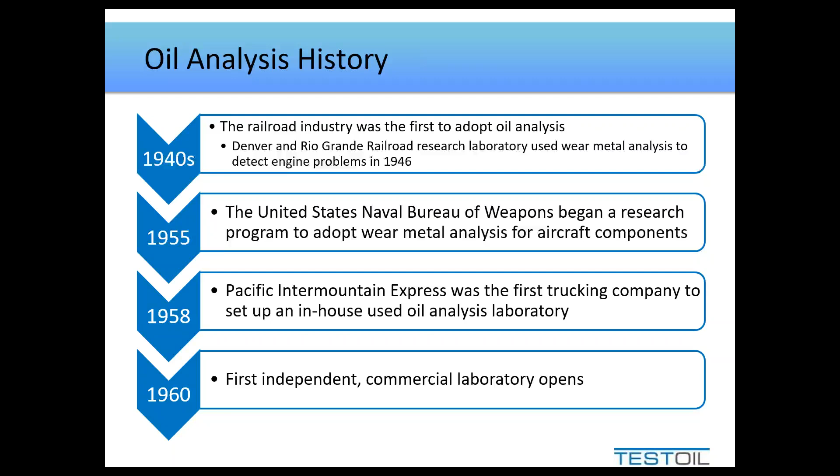Now, to begin this webinar, I thought it was worth taking a step backwards in time and looking at the history of oil analysis. So here's a quick overview of how oil analysis got started. The railroad industry was one of the first ones to actively engage in oil analysis as a preventive maintenance strategy. About a decade after this happened, the United States Naval Bureau of Weapons was looking into it. And within a few years, you started to see trucking companies use it. After the initial successes, the very first independent commercial oil analysis lab was opened, and the rest, as we say, is history.

Now, why I point out this timeline is just to highlight what it was like back then. All of those early adopters had a few things in common. They were all very large fleets with a very limited number of different OEMs, model configurations, things like this. Almost without fail, the only sample that was taken was at drain. It was always taken from the same location and under very similar operating conditions, because if it was a trucking company or a railroad, they would run the same routes, they would operate the same way, so even seasonal variances would be accounted for. The other thing, though, is there were very few customers and there were very few labs. Therefore, there was a strong relationship between the labs and the customer. So if the results came back a bit weird, the customer usually could phone up the lab and they'd have a discussion about it. If, for whatever reason, a failure was missed, again, the customer could work with the lab to reestablish some alarm limits and make them better.

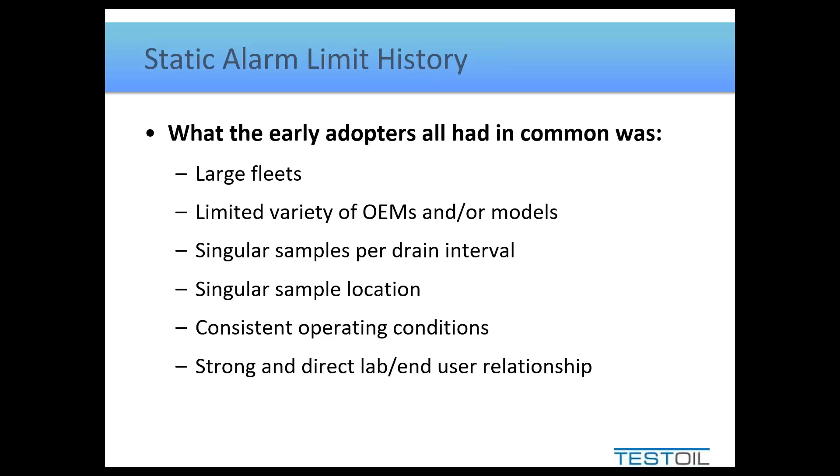In today's world, if this was to exist, we would refer to this as big data. This is what we use today to try and make sense of a whole bunch of data, and that's something that they were able to do 60 years ago when oil analysis was really kicking off. They could figure out what normal looked like, and they could see what was the trend towards the abnormal variances or triggers, and set the alarm limits to ensure that the warning came soon enough, but not too soon and not too late. Now, the nice thing is, like I said, because they had these large fleets always operating up and down the same roads, the same rails, they could account for any seasonal variations or operational variations as well, and make sure that whatever noise occurred in their data didn't trigger any alarms.

So this is how good it was, and this is, like, again, oil analysis at its infancy. And the thing is that this established a reputation for oil analysis that has carried forward to today, but actually is no longer that valid.

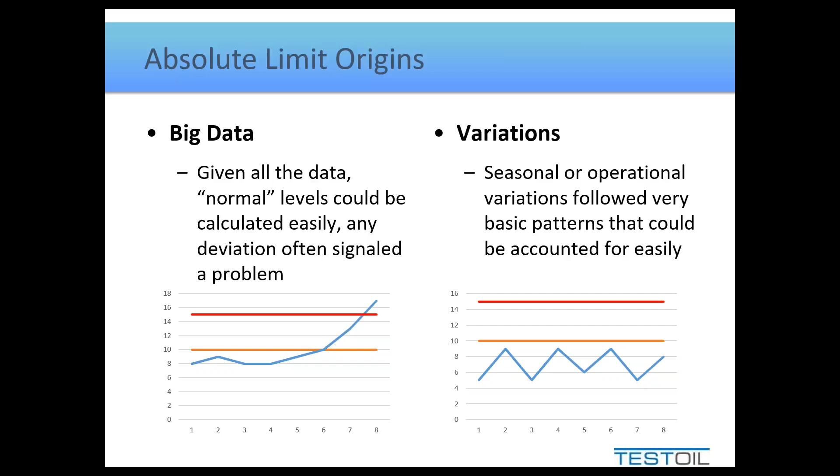A good example would be to show you what oil analysis today looks like. So your average commercial oil analysis lab deals with all sizes of fleets, right down to a single one-off application. We have virtually an unlimited variety of OEMs and models. We now take multiple samples per drain interval, so we're not just sampling the end of drain sample, we take what we call mid-interval samples. We have less control that the samples will be taken from the same location under the same conditions every single time. And given how many people have adopted oil analysis, there's many, many more times customers than there are labs.

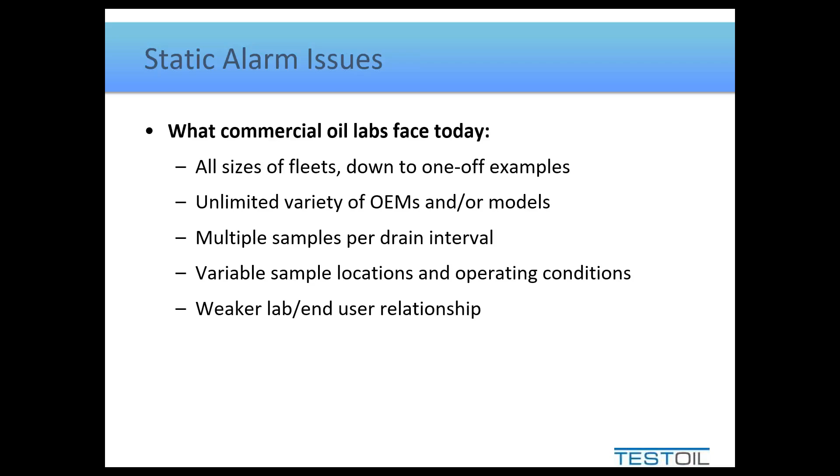So there's a much weaker relationship between the customers and their labs, to the end that most labs are unaware of any efforts the customer may be making to extend drain intervals or extend mean time between failures or any of the other common metrics that you might look at. And where this kind of gets funny is that to this day, we will still receive samples and they'll be marked something like Gearbox 101A and no other information. They can't even tell us what kind of oil it is, what brand of oil it is, what viscosity it is. We don't have a sump volume, we don't have any make model information to go with it, nothing. And why I point this out is even though these types of samples still hit the lab, the most common thing people are going for is to ask a question like, what's an acceptable level of, whatever it might be, a wear metal, a contaminant, a degradation property. And that is a very, very difficult question to answer when so little is working in our favor anymore.

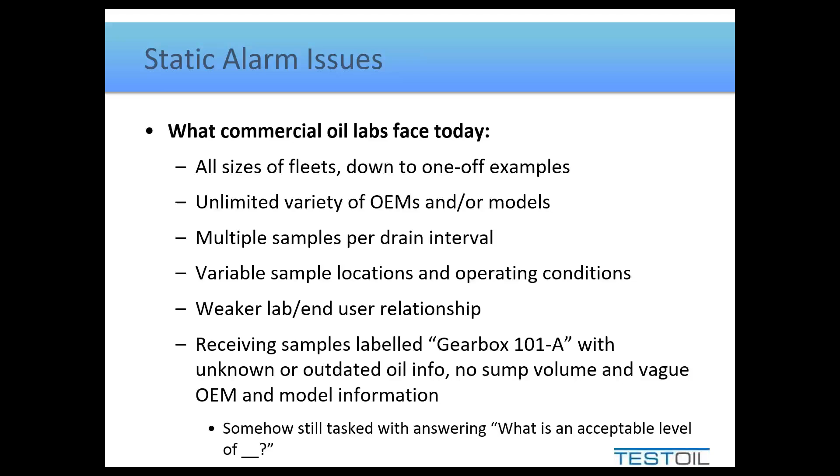So what I'd like to do in the beginning part of this presentation is walk us through where some of these static alarm limits come from. Now, basically, there are four main sources. You can get them straight from the OEM. You can get some from your lubricant suppliers. If you're lucky, you might have industry-specific limits. These might come from user groups or other organizing bodies. But ultimately, most people do rely on the commercial labs to provide some set of limits.

Now, as I go through those first four, what I'm basically going to do is absolutely tear them apart and point out how lousy they are. Most of them don't work well on most samples most of the time. Ultimately, what you would like to work towards, if you felt static alarm limits were the thing to do, they would be set by the end user and they'd be in line with any goals they have. Now, I'm not going to show how to do that. I'm going to then transition over to trending, but I'm going to go through these first four and explain to you why they're so bad.

So every one of these is a real example. I credited some of them. The ones that I pick on the most, I don't tend to credit because I don't want to be disparaging towards the person who supplied it. But let's start with OEM limits. So here's an honest-to-goodness published OEM limit. There's a major typo in this table that I guess was never caught, and I've reproduced the typo just so you can see how little these tables might be used, because somebody should have caught this and fixed it.

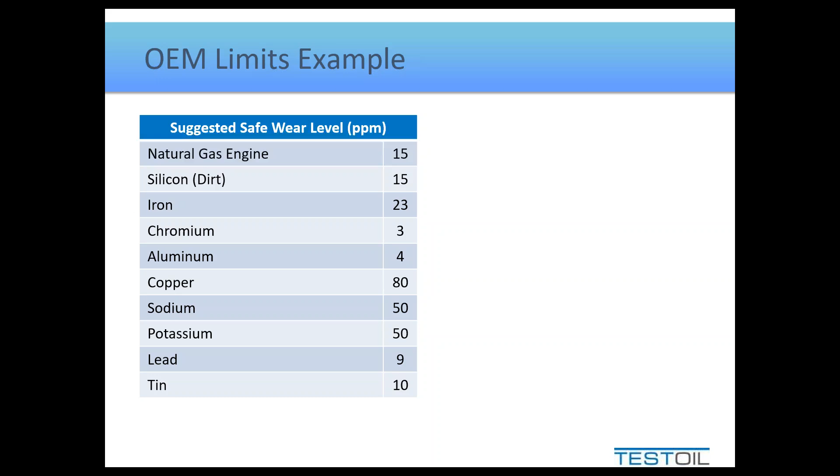Now, the whole time I've been talking, perhaps somebody has picked up on what the typo is, but looking throughout this list, at the very bottom, 10 parts per million. If you told me how big the system was, I could find a way of representing what 10 parts per million looks like, how much tangibly that would actually be in terms of bits of material. But if you look at the top of this table, 15 parts per million natural gas engine, I don't know how I can show you that. So I'm just pointing out the silliness of this table, that somebody didn't catch on to that particular line.

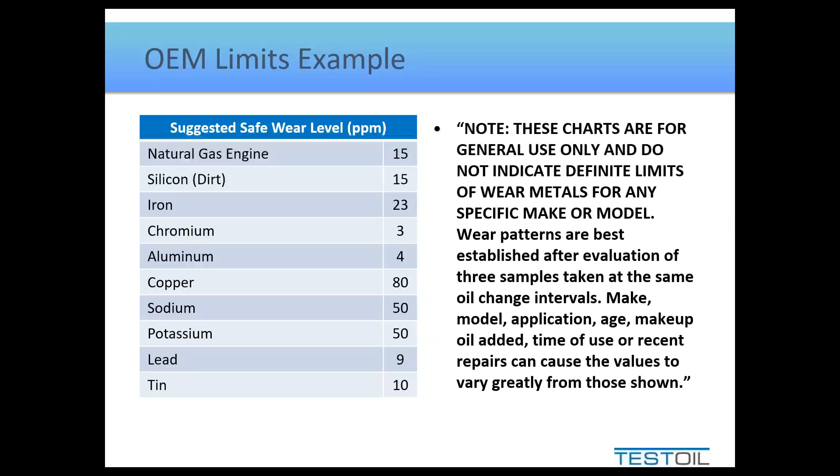So why do OEMs publish limits like these? Well, they're really only there to highlight major issues, and most of them are surrounding some type of warranty dealings, whether it's a warranty claim or just ensuring the proper service is done during the warranty period. But generally speaking, the OEM's level of interest is centered around making sure they can get through the warranty period. Now, the other little tidbit I'll throw in there is that generally speaking, it's implied that all these limits apply to the end of drain samples only.

They don't really give you any clue as to what it might look like during service, just at end of oil drain. Now here's another quick example of an OEM supplied limit. This one says water contamination of engine oils in concentrations as little as 500 ppm can seriously affect the oil's filterability and the function of the oil's additive package. Well, that sounds fairly serious.

But then the second sentence says the detection of water in concentrations above 0.3%. Now it's funny, they switched units of measurement here. So I've given it to you, it's 3,000 ppm. It says warrants immediate corrective action and an oil change. Well, that's kind of interesting because they provided us with two different limits. They said at 500, it could be a problem, and at 3,000, we should definitely do something.

But that just begs the question, what do you do in between? Like, that's a big gap. So is this caution and critical, or what are we talking about here? So this is not a great limit in the essence that if we set 500 as our alarm limit, we might go into alarm because there's a potential for a problem, but doesn't necessarily mean we need to do an immediate action. But if we set the second limit for saying, okay, you must do an immediate action, well, there's 2,500 ppm in there where it could cause serious harm. So if you see what I'm saying with this, it's not very good.

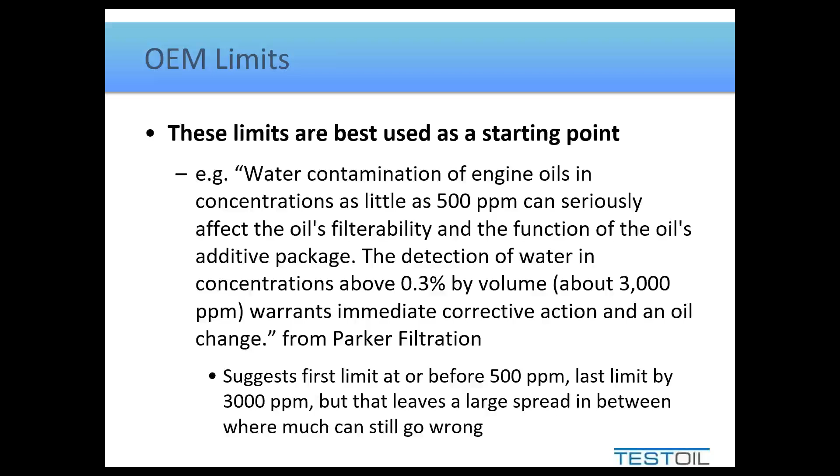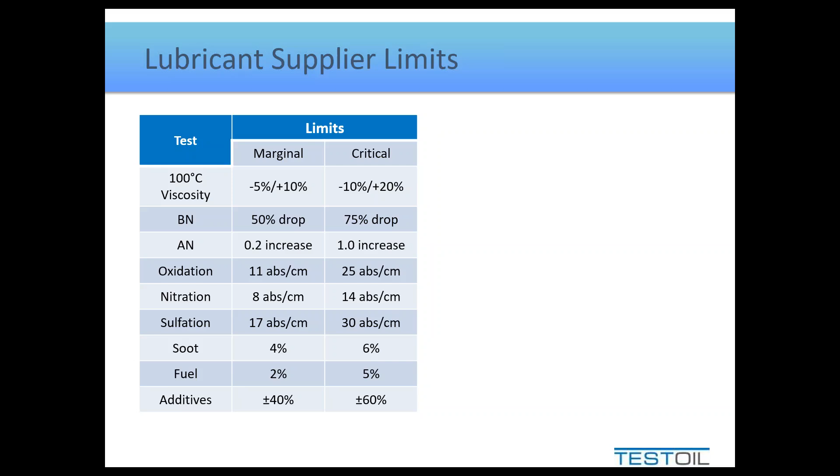So looking at OEM limits, generally speaking, we don't find a whole lot of good information presented here. So where some people look is the lubricant supplier. After all, we're measuring oil, so wouldn't the people who make the oil know the product the best? Well, they might, and they might publish tables such as this one. I mean, if you scan down the list of criteria here, it's fairly inclusive. There's quite a few parameters that are provided, but this is the kicker. Where is any discussion surrounding contamination or wear? I mean, that's exactly what we saw on the previous couple of tables.

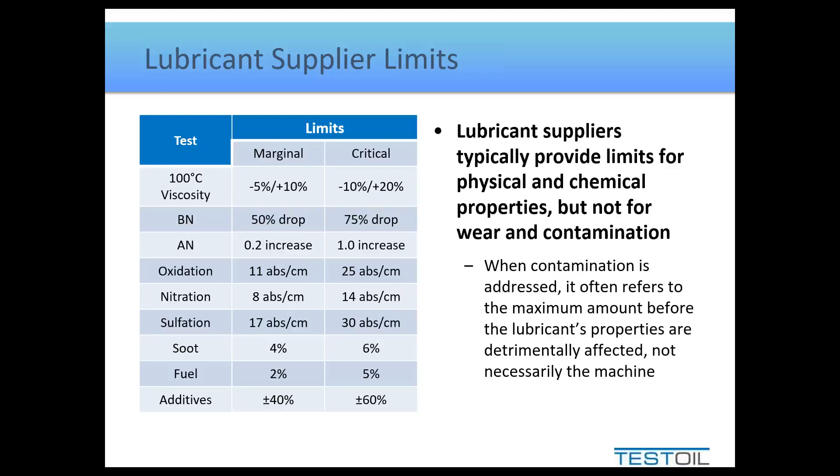This one only addresses fluid properties, but you know what, that kind of makes sense because the physical and chemical characteristics of the fluid are things the lubricant supplier will know. Now, if they do address contamination, you have to ask yourself the question, is this the limit for any machine or just the limit for the fluid to do its job, generally speaking? And chances are they're looking at it from the fluid's perspective because, of course, they are the supplier. Now, I will be fair, not every limit on that table is garbage. Some of it actually makes some sense.

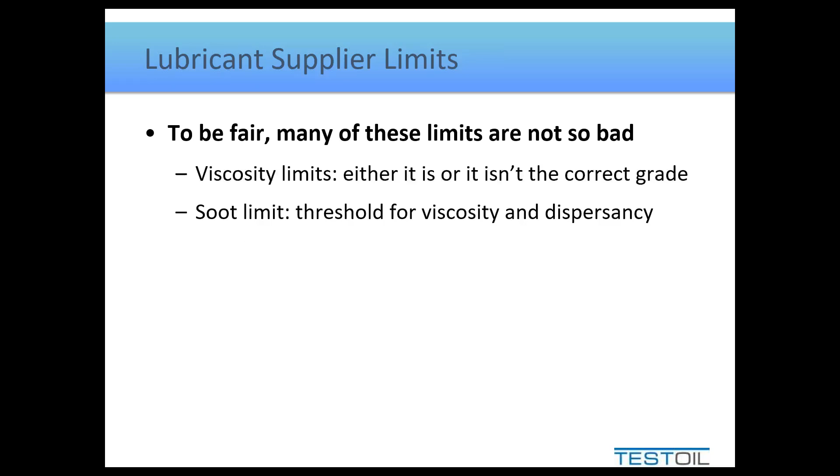So if it's an outright physical property like viscosity, sure, we can use limits because really it either is or it isn't in grade. If they give us another property like, say, soot, well, that's probably the limit for how much soot can be present in the oil without causing a detrimental effect to its viscosity or some of its additive performance. There's a fuel limit, probably just the viscosity we're worried about depressing. Now, if they do provide any limits on the additives, what you have to wonder is what are they actually looking to accomplish with this limit?

And generally speaking, again, most of them are self-serving. So they're wondering about not necessarily, of course, a warranty claim, but just a claim against the performance of their product. So they're really using this to identify their product. So they're not saying if the levels are within the range, the product is working. They're just saying if the levels are within this range, it looks like it is, in fact, our product.

Now, when they measure degradation properties like oxidation or acid number, base number, again, what's the threshold that they're giving you here? Is this the worst it can get, and therefore you should change the fluid? How fast should it get there is not covered. I mean, they're not really giving you a lot of information. So again, we've looked at OEM limits, we've looked at lubricant supplier limits. They're not fantastic, that's for sure.

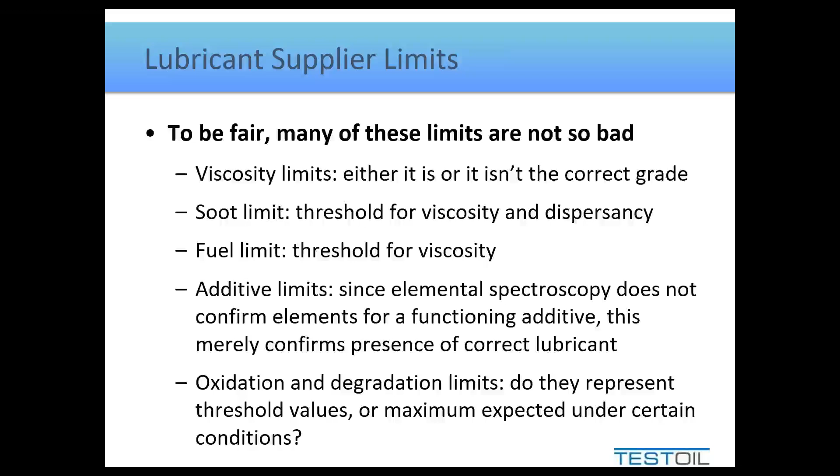Now, you may be fortunate and you may be able to find industry-specific limits. And this is an example of one of the most widely cited tables in the condition monitoring oil analysis circles. If you look across the top, it gives a variety of machine types, so it's pretty inclusive. And down the left-hand column, it shows us a bunch of different properties. Now, you will notice there's a lot of blanks on this table, but for the properties that are filled in, those limits are actually not that bad. They're pretty good.

But what most people who see this table or have been given this table don't do is read the title of the standard where it came from. It is an ASTM standard. It's D6224 if you'd like to purchase your own copy. But the title says it's the standard practice for in-service monitoring of lubricating oil for auxiliary power plant equipment.

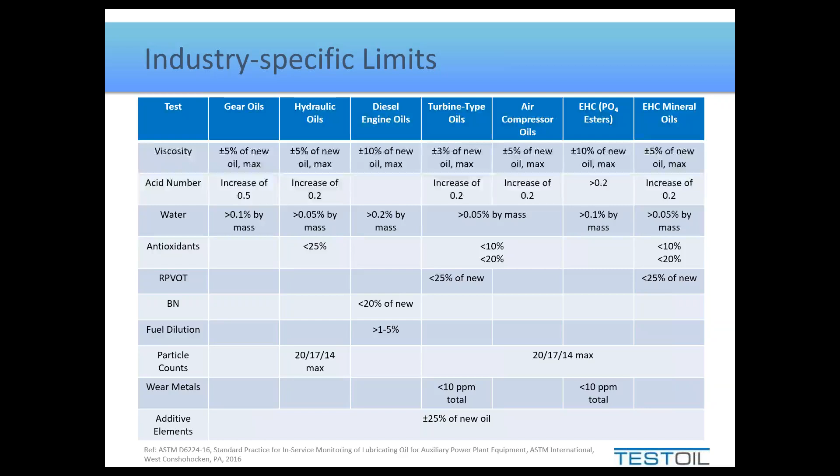So this isn't just for any gear, any hydraulic application. This is for gear and hydraulic applications inside of power plants, and it's the backup equipment, not necessarily the base-loaded, continuously running equipment. So again, now you have to take all that with a grain of salt and wonder, do these limits still work? Maybe they do, maybe they don't.

But the point is, it's worldwide wind turbine gearbox. So this isn't for any other gearbox. It's gearboxes specifically up in the nacelle of a wind turbine connecting the generator to the turbine. That is its own unique characteristics of operating conditions, loads, speeds, etc. Does this necessarily apply to other gearboxes?

Again, probably not. So you'll notice that this is yet another example that doesn't address wear and contamination, which are generally among the highest things of concern on an oil analysis report. It doesn't claim that if you stay within these limits, you'll definitely have optimal performance. It probably just means, again, you get through the warranty period without any major issues.

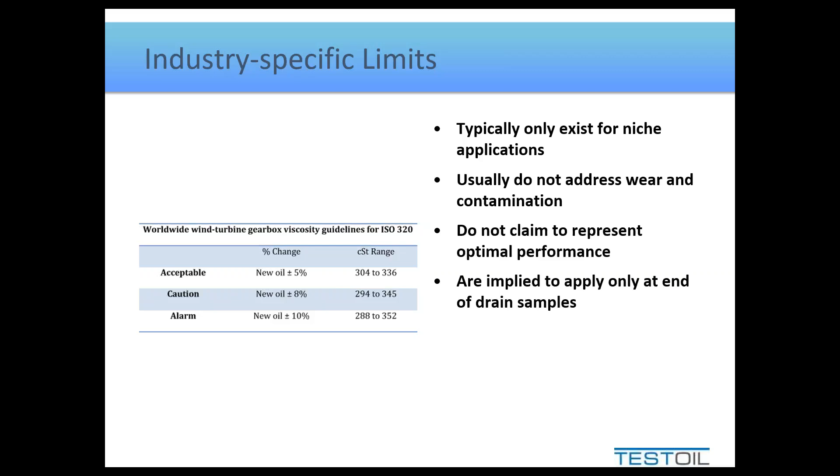The implication is these are end-of-drain samples. It's not necessarily outright stated at any point, but they don't usually go out of their way to say what any mid-interval values might be. They just sit there and say, if this is exceeded, the fluid probably needs to be changed out. So my question is, if you achieve these levels within a normal service, you're probably triggering a lubricant change.

But if you achieve these levels on the very first sample, all you're going to end up doing is changing the oil, but not necessarily elevating the alarm, realizing, wow, we got to that level a lot sooner than we should have. Maybe something different is happening. Maybe there's a mechanical issue. But no, we just use it as a guideline for when to change the oil.

So these first three examples are not very good: OEM, lubricant supplier, industry-specific ones. Most people, like I said, do rely on the commercial labs. Now, the commercial labs have two different ways they can come up with limits. So I'll go through the first one here, static limits, and then I'll come back to the rate of change, is what we call the other ones.

Now, the nice thing about static limits and why most commercial laboratories like to use them is you can plug them into your computer and the computer will auto-comment on all the oil analysis results. So this speeds up turnaround time at the lab's end of the business. Now, again, they're implied and they work best on end-of-drain samples, not necessarily all the mid-interval samples.

But to be fair, some people will statistically derive their limits, and almost without exception, they use the end-of-drain samples to do so. So they can get downright specific, and they can tailor your limits to a machine type, to a make-model combination. They might even align it with the oil that you're using as well. So they start to sound like they're really good because they're really specific, but does specificity make them better? So let me show you a few examples of some of the issues that I see.

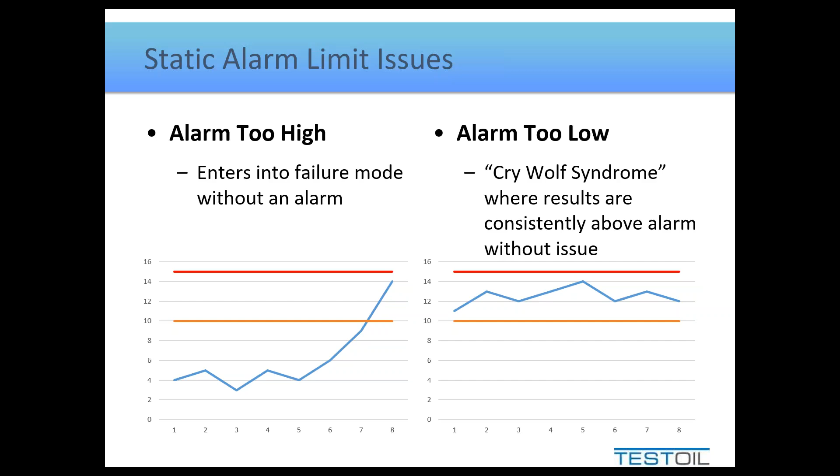But here's the issue. When you build your limits, there are a few assumptions that come with that. And the assumption is the sampling location never changes. It's a consistent sump size. The interval as well doesn't change. And of course, nothing's changing regarding how you operate it, what fluid you're using, speeds, loads, temperatures, all these kinds of things.

So there's an article that I'm about to show you. They published some tables in this article, and I'm going to show you the statement they made after the tables, because the tables aren't worth reproducing once you read the statement that the author made. But I thought the author said it very, very well, even if it wasn't necessarily the intent of them describing the tables.

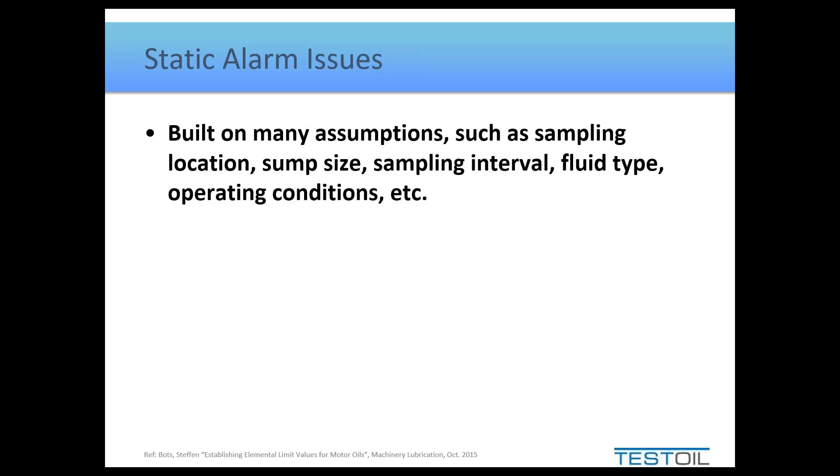So hear me out. This is the comment they made after they published 3 different tables for wear metals, contaminants, and additives. It says the warning and limit levels listed in tables 1 through 3 for wear elements, contaminants, and additives are based on, and now they go to qualify where they got the data. So they said it was on a semi-synthetic motor oil, 10W-40 viscosity, modern diesel engine, an oil volume of approximately 25 to 50 liters using a specific fuel, and with an oil service life of approximately 500 hours or 47,000 miles.

So now take all that information and understand what they're saying to you. They're saying that if you try and use those 3 tables that he published and you aren't running semi-synthetic, or you're running a different viscosity, have a different volume, use different fluid, maybe have older diesel engines, maybe it's not even diesel, maybe it's gasoline, and if your operating hours are different from 500 or 47,000 miles, well, this table's no good. So these are great limits, I'm sure, if those are your conditions.

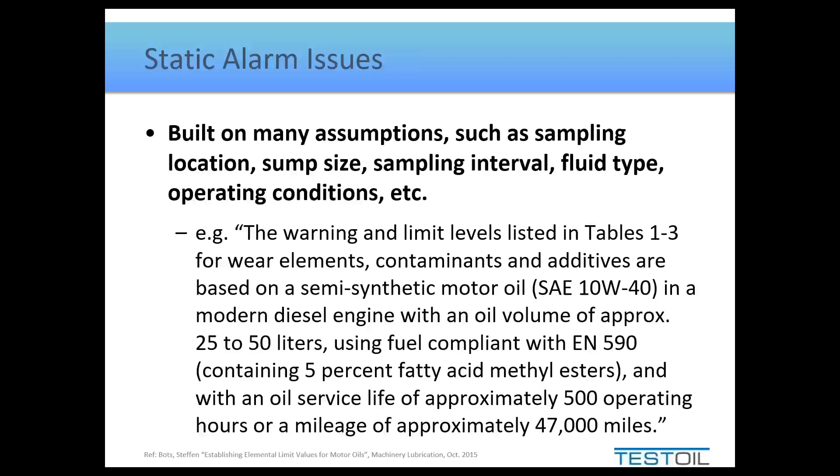So we always have to consider that when labs do this, it is that specific, and if there's any change, then it basically blows the limits out of the water and says it's probably no good anymore. But I thought that's not a very fair statement to say at this point that all limits are terrible. What if one of his limits is actually decent? So I chose one particular limit of his. So I'm going to pull 100 ppm, and this is for iron, as a limit.

Now remember, they did say 500 hours of operation. That is one qualifier that we're going to have to stick with. But what I'd like to walk you through now is the issues I have with trying to use even the best established limit of 100 ppm iron at 500 hours of service, and show you how the sump volume, the sampling interval, and even our own perceptions work against us as to knowing whether that value makes any sense or no sense.

So let me give you the example on sump volume. And there's a poll question coming up here. So if you had a 5-gallon reservoir with about 2 fingernail clippings worth of iron, and you compare this to a 50-gallon reservoir with nearly 3/4 of an ounce of iron, and your third choice is a 500-gallon reservoir with nearly a ½ pound of iron. These are the considerations we have for the poll question.

Okay, so I've launched the poll question, and again, the question is, which system is experiencing the highest wear? Is it the 5-gallon system, the 50-gallon system, or the 500-gallon system? So y'all can start entering your votes. I'll give it just a few seconds. So we're up to 45% voted. I'll give a few more people time to weigh in.

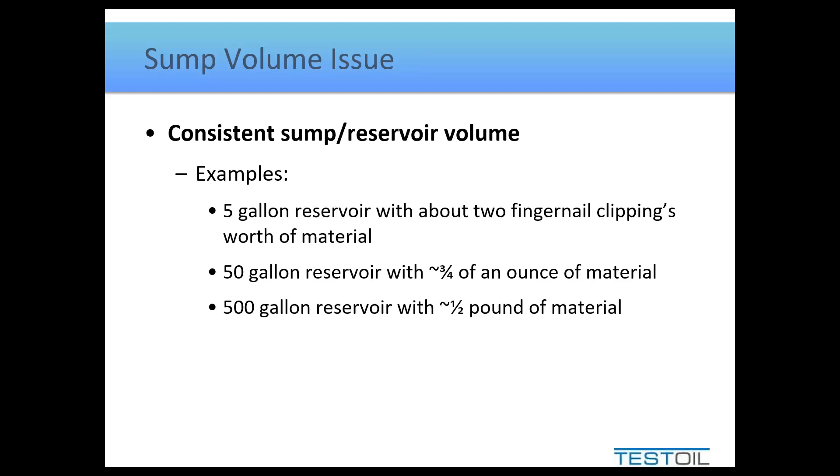Sure. And here's the issue. Which one is experiencing the most wear is not going to be seen on an oil analysis report, because all 3 of those would measure out at exactly 100 parts per million. And this is the issue we have when we start changing sump sizes, but we try and use the same limit that was built on a particular sump size and doesn't match what we're currently operating.

So you can appreciate that in the 500-gallon reservoir that required nearly a ½ pound of material, that might have been an entire gear tooth out of a gearbox. But in that 5-gallon reservoir, like I said, it would amount to only about 2 fingernail clippings worth of material. Very different physical amount of iron, but in the end, because we measure concentration, all 3 of those examples measure out exactly the same. So when we try and use limits, it doesn't really work.

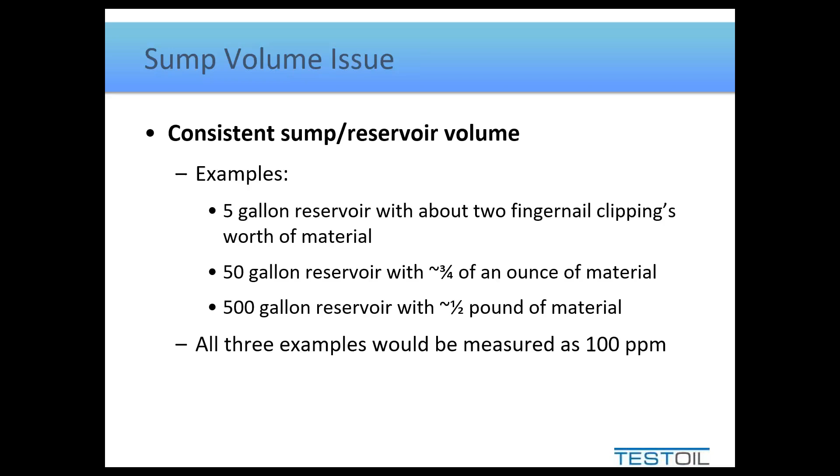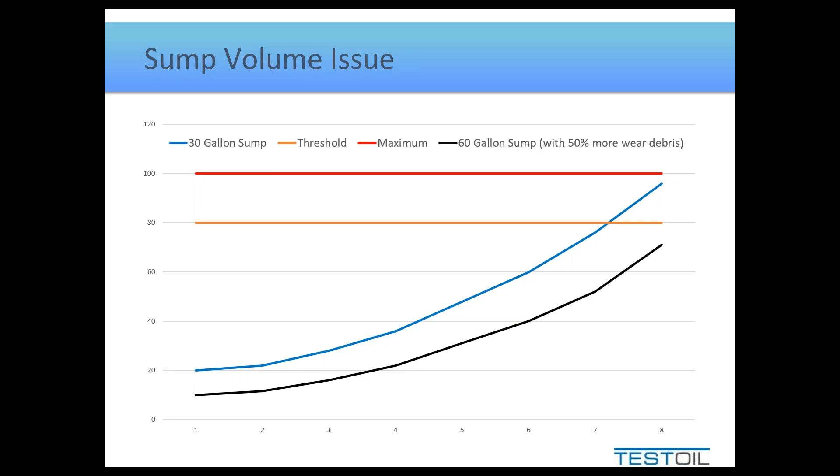And what you notice is that the black line does not intersect the threshold where the first alarm would go off. So in fact, that system's wearing worse, but because we have the static limit of 100, we have not tripped the alarm. And we don't know that that's occurring. And that's just because the sump size would have been built off something like, say, 30 gallons, and we're comparing it to a 60-gallon sump. So we always need to consider what's going into this calculation and how much that affects the ultimate outcome of the limited usage we have for a limit.

Now, I'll give you a few more examples here. So assuming then the 500-hour drain interval that was stated in the article and 100 ppm for iron, let's wonder what would it look like if we extended the drain interval up to 750 hours. Well, 750 hours, that's 50% longer, so you might expect 50% more wear. So 150 ppm should be considered normal.

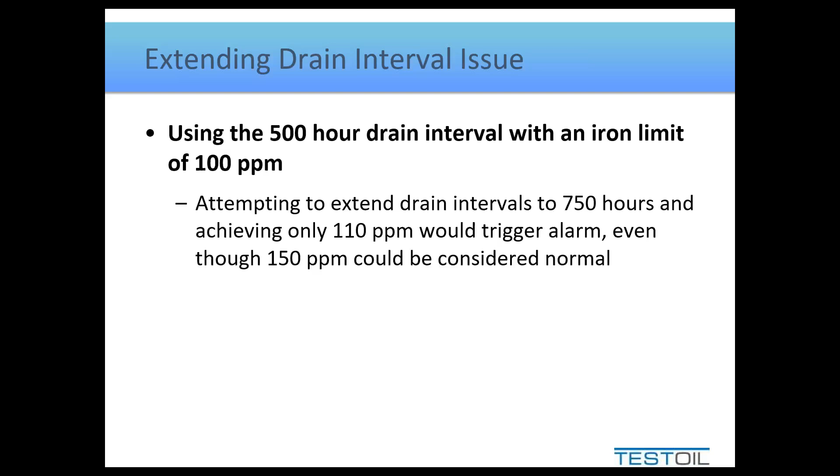But my point is, because we just set this one alarm at 100, 110 ppm would actually trigger the alarm. So even though you've run 50% longer and experienced only 10% more wear, an alarm goes off because the alarm is static. It doesn't move with the data. So you can see how you're going to end up possibly in that cry wolf syndrome again. So this is what I refer to as the eventuality factor.

If you set any limit, eventually the oil will cross that threshold. The question isn't whether it crosses the threshold. The question is, how soon does it do it? Does it do it within the normal expected interval, or does it do it faster? Because if it does it faster, I need to know and I want to take greater action. But if it does do it within the normal interval, then that's considered normal. And if it takes longer than the normal interval to do it, well, obviously that's an improvement perhaps, or maybe something else is going on.

So we have to be cautious when we apply these static alarm limits to know that eventually we're going to cross them. Doesn't mean there's a problem. It just means perhaps we've extended the drain interval or the rebuild time or whatever it is, being long enough, we're going to come to that set of circumstances that raises the value.

Now, the other thing I'll point out is that when we set these alarm limits, what we end up doing is missing overall trends. In this data here, you can see that the data is increasing. It goes into alarm. Obviously, corrective action is made. It goes out of alarm. And it goes into alarm. Corrective action is made. It goes out of alarm. And all we notice is this pattern of in and out of alarm. We don't necessarily notice that it's constantly increasing.

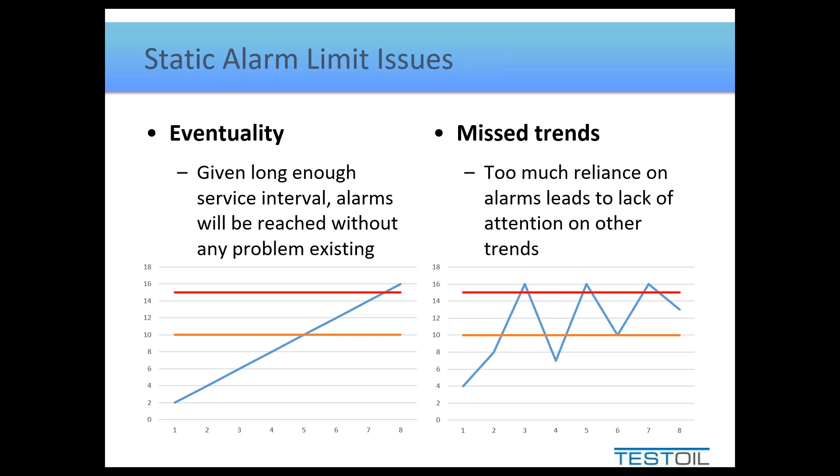Now, maybe that's increasing for a bad reason. Maybe that's increasing for a known reason. But we've missed the overall trends because we're just so concentrated on if it's in alarm and how do we clear the alarm.

So one of the things I stated with the implied data from the lubricant suppliers, the OEM, was that they're always based on end-of-drain samples. So then some people think they start getting clever and they go, well, what if we just include more data? If end-of-drain is not necessarily the best piece of data or the only piece of data to use, what if we just include more data?

Won't that make it better? Funnily enough, the more data you include that isn't your end-of-drain data, the worse it gets. If you start including mid-interval samples and try to calculate your alarm from this, you're going to approach the halfway point. Let me show you what I mean.

We're assuming that at end of drain, 100 ppm iron is what's going to be achieved. If we take one end of drain sample and calculate the average, it's 100, of course. But what if it takes two samples to get to end of drain? One sample is at the halfway point with a value of 50 ppm, and the end of drain sample has 100. Well, our average becomes 75.

If we split it into three, with one at a third of the way through, one at two-thirds, and still keep the end of drain point at 100, the average gets drawn down to 66. I added in twice as many data points again, and you can see the average gets pulled down even closer. So my point is, with an infinite amount of data, you'd arrive at an alarm limit of 50 ppm, assuming you're achieving 100 ppm at end of drain regardless. The more data you add, the worse it gets.

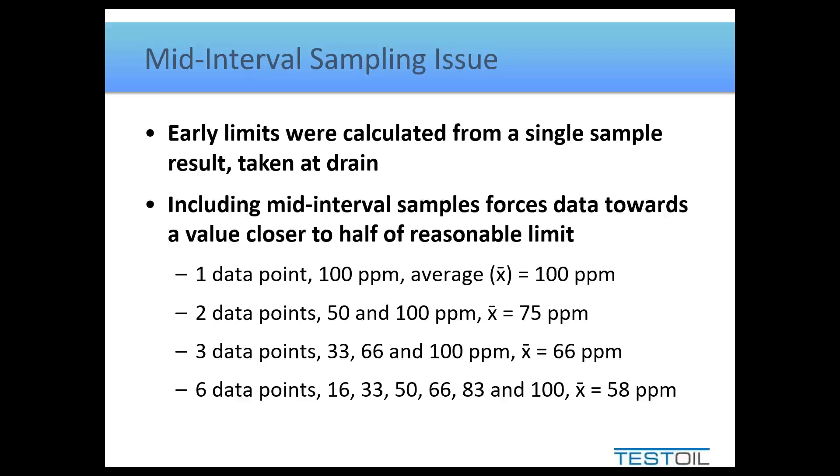Therefore, logically, you can only use the end of drain sample to calculate your limits. But that limit works very, very poorly on all the samples leading up to that end of drain.

So if we assume 100 ppm is what's achieved in 500 hours, then we'd think 50 ppm in 250 hours is normal. But the problem is, with an alarm limit of 100, we don't trigger the alarm if we get to 90 ppm in 250 hours, because it's still below 100. And even if it crosses over 100, we don't elevate the alarm and say, wow, you got to this limit in half the time you normally do.

An alarm just gets set off. It's just a blinking light. The same alarm goes off regardless of when it goes off, how quickly or how slowly. So it's very difficult to establish a static limit for mid-interval samples. Even if you know it's always taken at that same interval, even if you could lock that down, which most people can't, you're still not going to establish a logical limit.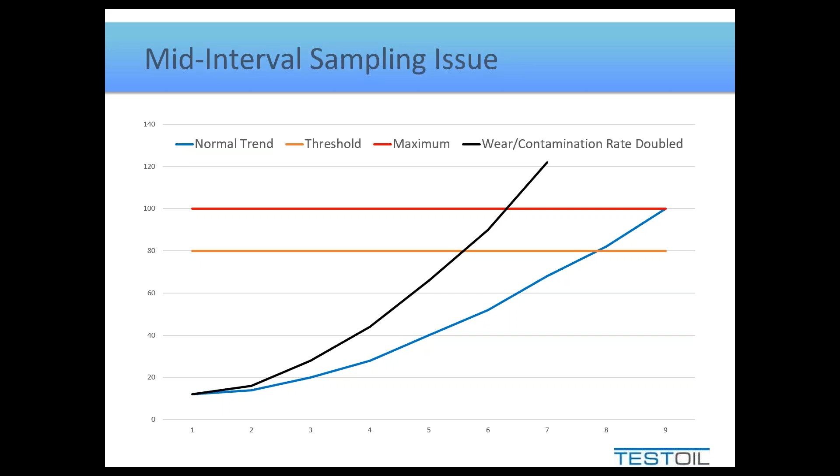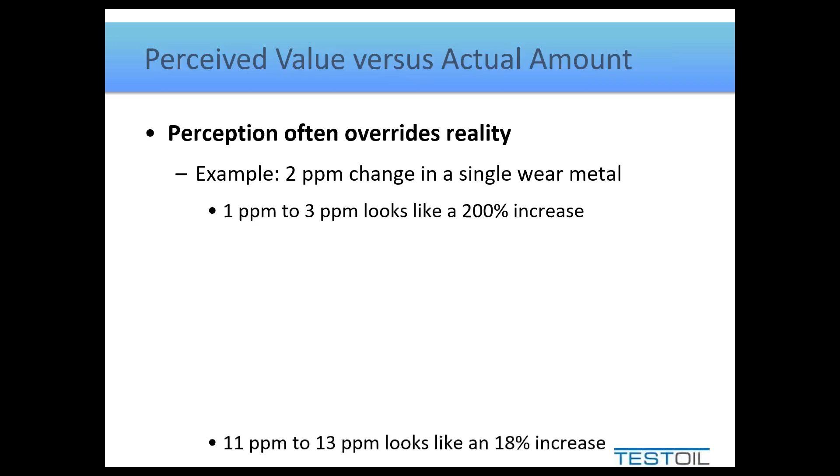Now let me provide another example so we can have a poll question. I'm going to show you a 2 ppm change. A 2 ppm change, if it goes from 1 ppm to 3 ppm, looks like a 200% increase. But if it goes from 11 to 13 ppm, that only looks like an 18% increase. And if it goes from 101 to 103 ppm, it's only a 2% increase.

So here's our next poll question: which system has undergone the greatest increase in wear? Is it the 1 to 3 ppm increase, the 11 to 13 ppm increase, or the 101 to 103 ppm increase? Go ahead and cast your vote.

I kind of have the feeling Evan's trying to trick us again.

Looks like we're up to about 50% voted, so I'll leave it open for a few more seconds.

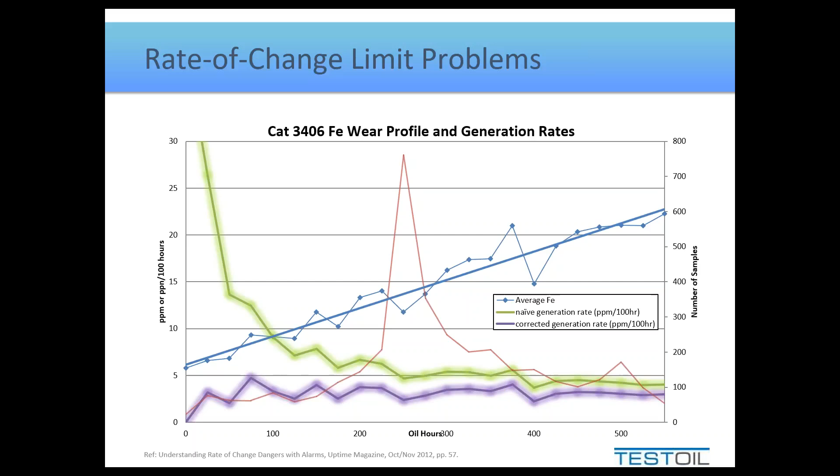So I've shown you that OEM, lube supplier, industry-specific limits, and even 2 different ways that the labs could do the limits on the oil samples, all have flaws, all are working in a very limited range where they could be good. And for most of us, they're just less than optimal. So there's got to be a better answer to all of this. And there is. That's the point of the discussion here, is trending. So having spent all that time picking apart how everything else doesn't work, let me show you what does work.

And a tool as simple as linear regression, right? This is not complicated math, can establish a trend and identify when the data is going outside of trend. It needs as few as 3 samples to establish a trend, and the 4th one can now be considered in or out of that trend. If there's any significant deviation from what the anticipated trend is, then we can identify it. And that doesn't matter if it's going up, if it's going down, or if it's flat. As long as it follows trend, it stays out of alarm.

And for those of you who still want to use limits, or still set on limits, or some of us might be held by regulatory limits, it works in harmony with those. You don't have to give up the limits to use the trend. The benefits of trending, though, you'll see.

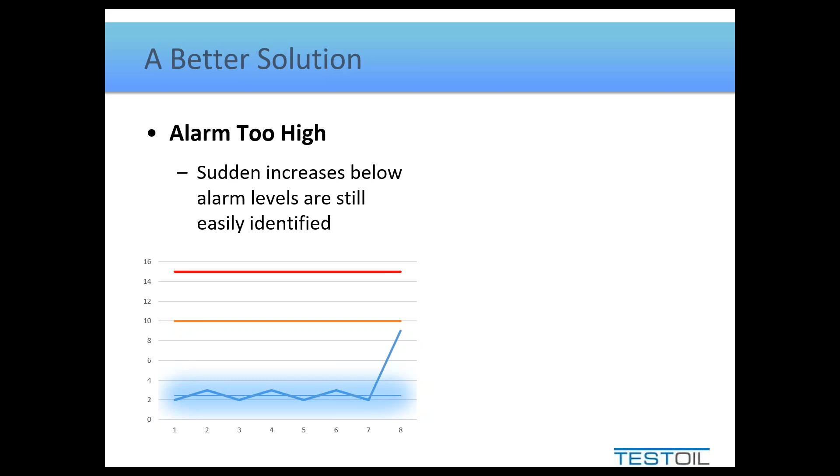On the flip side, when we have that cry-wolf syndrome, this now rewards the consistency and says, no, there's no reason to alarm this. It is constantly within the same range. Leave it alone. Turn off the alarm. Right? So this actually helps us get rid of nuisance alarms. That eventuality factor I spoke of, it now looks at it and says, no, that's the projected trend. I expect you to increase slowly over time. So as long as you keep doing the same amount of increase for the same amount of time, I am not going to alarm it, regardless of how high you eventually get. And that really noisy data I showed, again, it just sits there and says, look, it's following the overall trend.

So it won't keep going in alarm and out of alarm or whatever it's doing. It again rewards the consistency and says, yeah, it's fine. So even if you're doing frequent fluid changes or turning on and off filtration or any other operational decisions like that, the trending software can account for it and not worry about it too much and say, no, it's still following the trend, leave the alarms off.

And really, if you come down to it, one of the most common complaints of anybody who uses oil analysis and pays close attention to their alarms is they have too many alarms, right? Most people don't sit there and complain that stuff is missed. Most people complain that they don't know what to do with all the alarms.

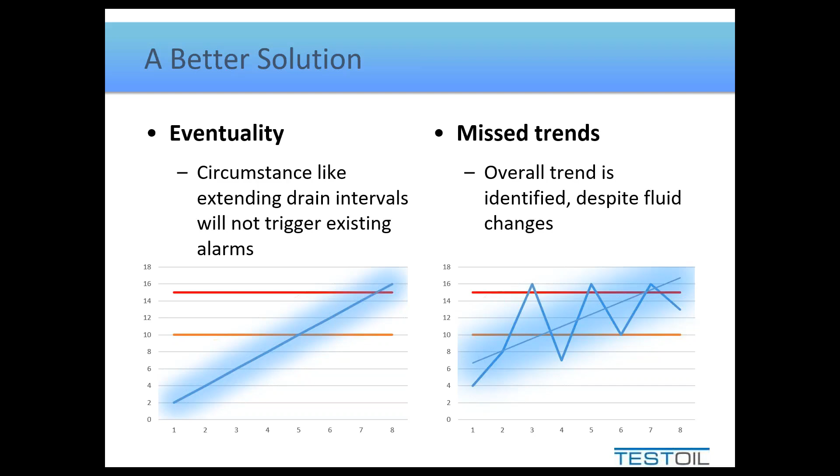Okay, so we have our last poll question. What kind of maintenance strategy does oil analysis fall under? Is it reactive, preventative, predictive, or proactive? We'll give you a few seconds to vote.

We're about up to 75% voted. Give you a few more seconds. Everyone seems pretty confident of this answer. So let's see if Evan is tricking us again. So I'm going to go ahead and close the poll. We are at 83%. And here's how everyone voted. It looks like a large majority chose predictive maintenance. So Evan, go ahead and let us know if they're right.

So yeah, the most common answer people pick is predictive, because when you think of predictive maintenance as a strategy, it usually employs condition monitoring, and one of the tools of condition monitoring is obviously oil analysis. But my point is this: the way most people tend to use oil analysis is not actually in a predictive manner. What they use it like is a reactive manner.